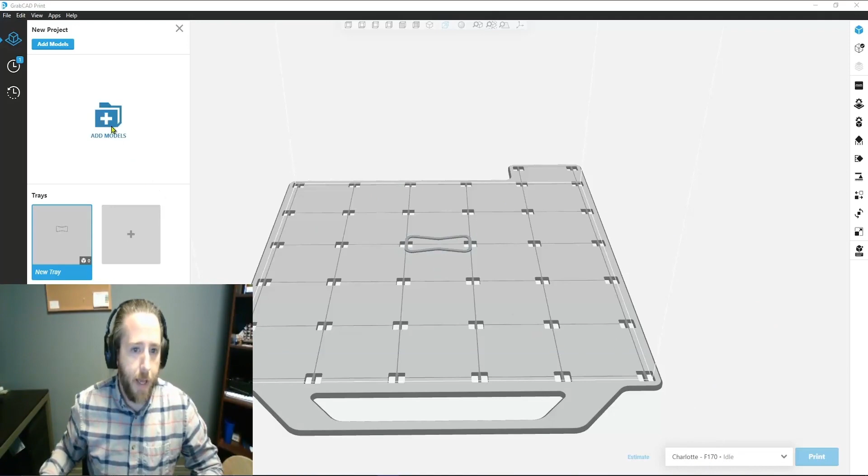Next, we're going to add our model. We're going to click on Add Model and open it up. We're using our native SolidWorks part file, and that is not the orientation we want to print this in, so we're going to go ahead and orient our face to plane.

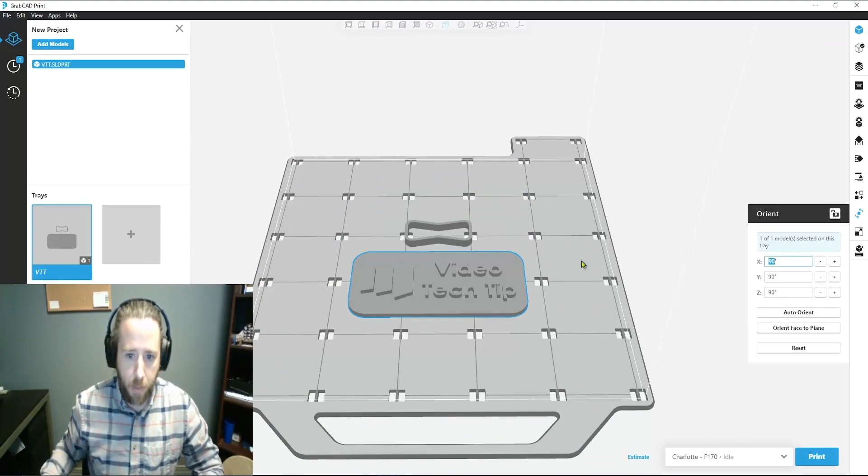This bottom part, we're going to put on the bottom. There we go. We have our model oriented the way we would like.

Check our tray settings. We're going to print it at 7 thousandths. We are using ABS. Everything's looking good there. We're going to change it to printing solid, and smart support, even though we won't have any supports here. So we're good to go.

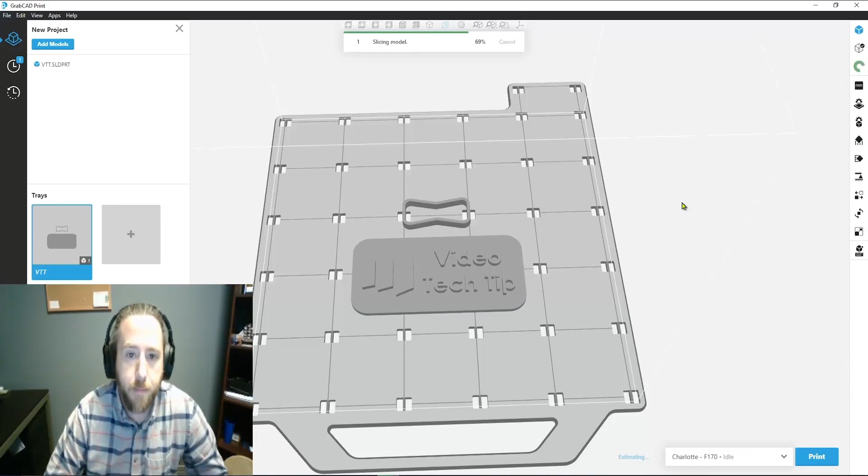We're going to go ahead and slice this file. And now we're looking at our realistic slice preview.

This is where we can add our Z pause, as you see here on the right side. An important thing to note about adding Z pauses in GrabCAD Print is the pause is at the beginning of the layer you're looking at. That'll make more sense here in just a second.

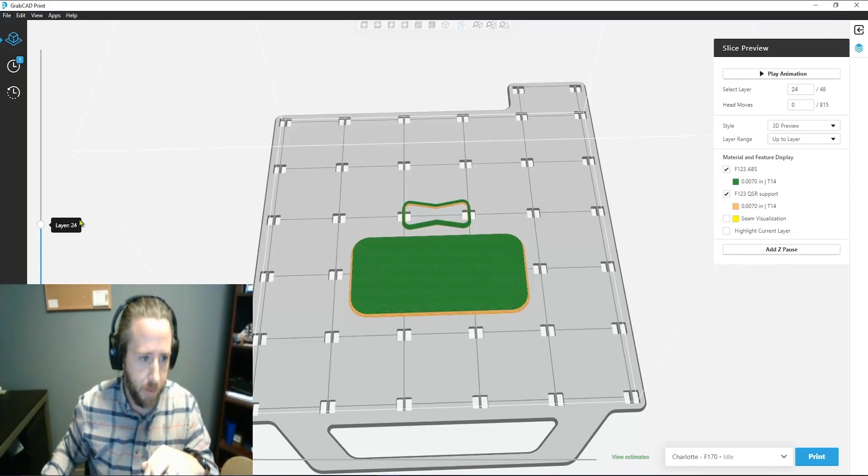So we're going to go up through this, and we want to do our pause and color change on the first layer of the text that's embossed on this plaque. It looks like layer 31 - you can see the text highlighted as we go up there. So layer 31 is where we're going to add this Z pause.

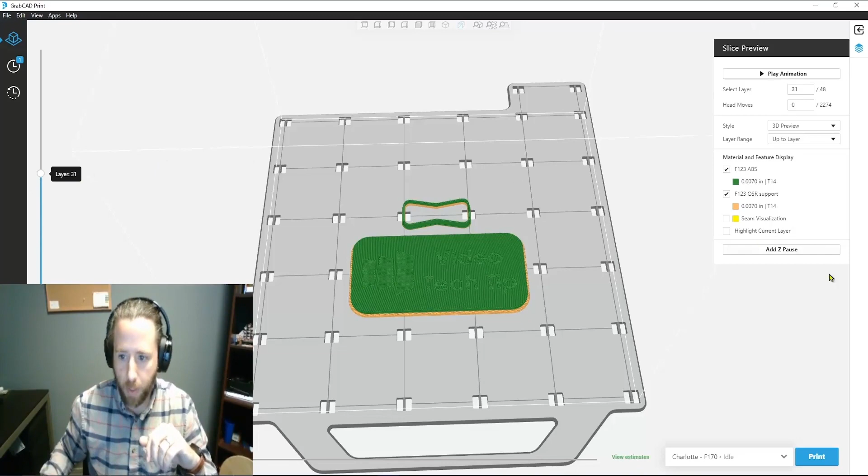We'll go ahead and add our pause, and you'll notice we get a color change here. Our Z pause is highlighted in this blue color, and we also have a diamond here on our slider bar on the left side. It's a really good visual indicator of where that pause is.

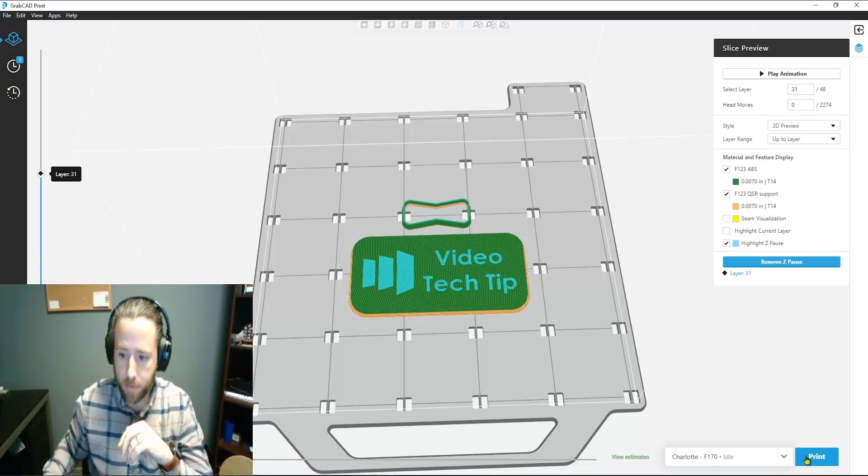And in the software, that's all we need to do. So we're going to go ahead and send this to our printer, and I'll see you at the next step.

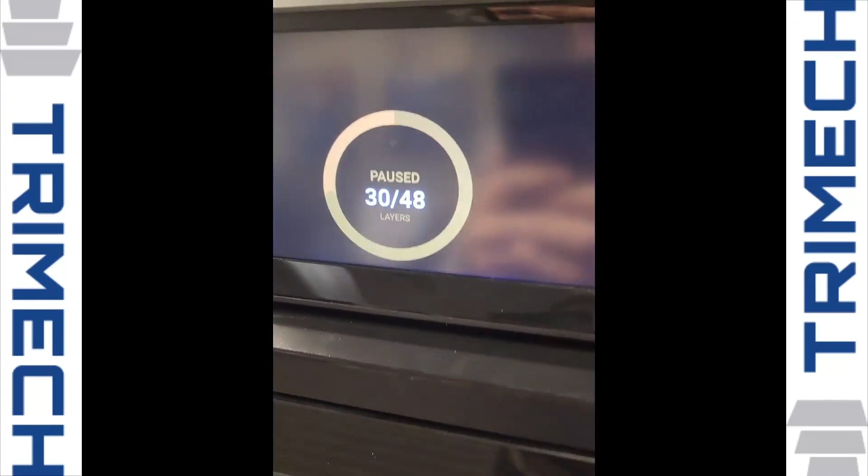So here we are at the printer. We can take a look and see that it is paused. Take a look at our print there - we're just about ready to start doing that embossed text, and we're going to switch to a different color.

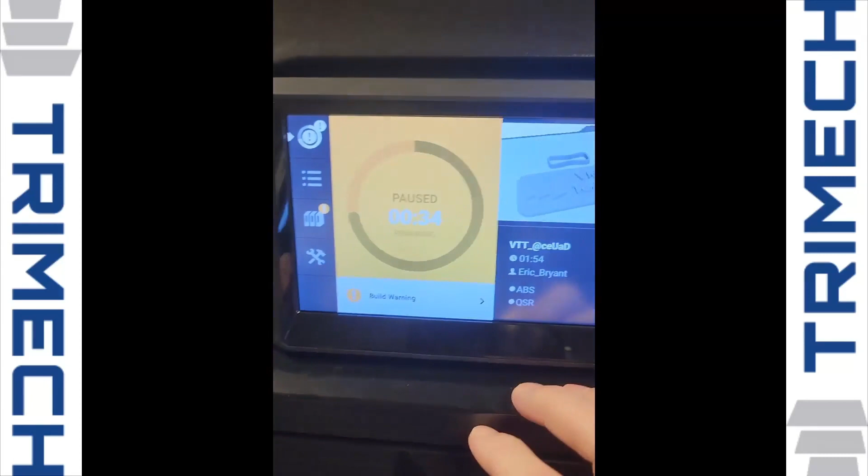So what we're going to do is go to our material button here. We're going to click on the selected material, and then we're going to unload it. Our material's done unloading, so we're going to spool it back up. Right, we got it spooled back up.

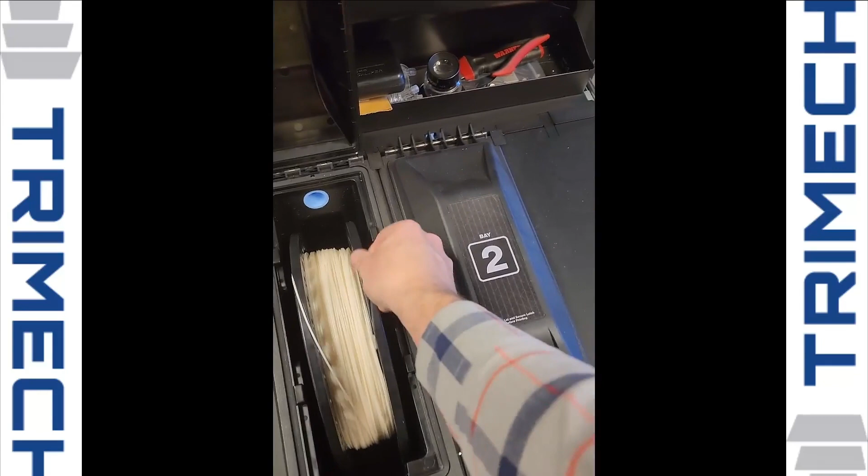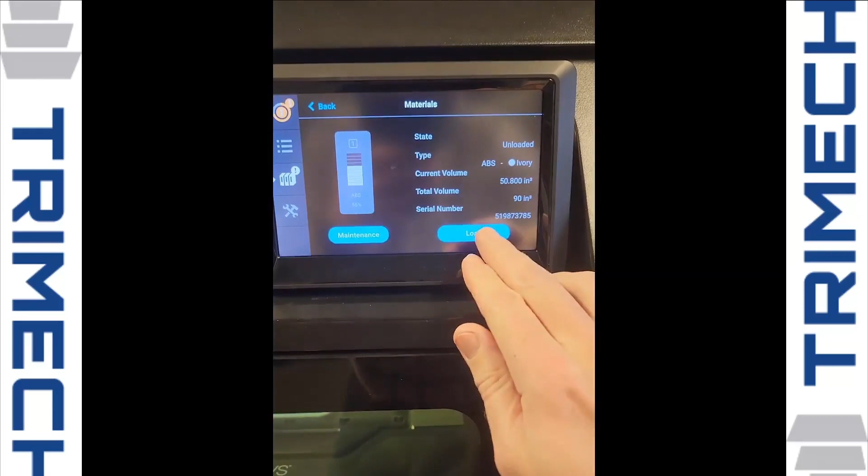We're going to remove it from the material bay. We have our ivory sitting right here ready to go. I'm going to drop it in, feed it back in. Now we can load this material. Close this.

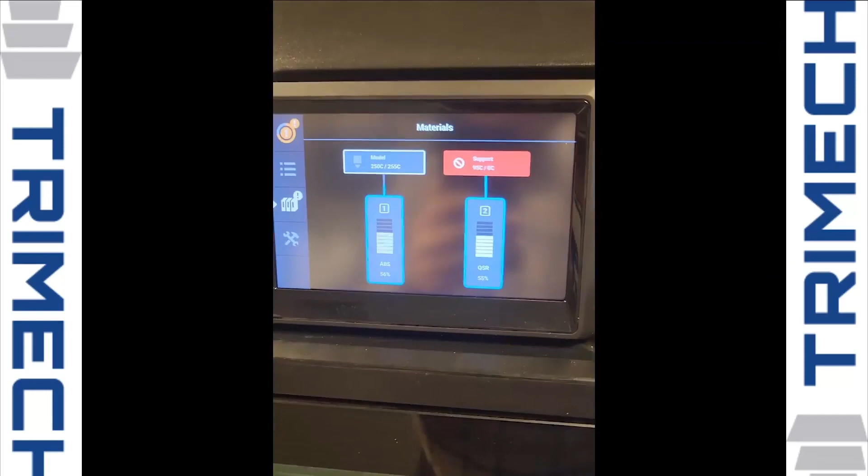We're done with the material reloading. The machine will automatically do a purge and wipe on the wipers. We're good to go.

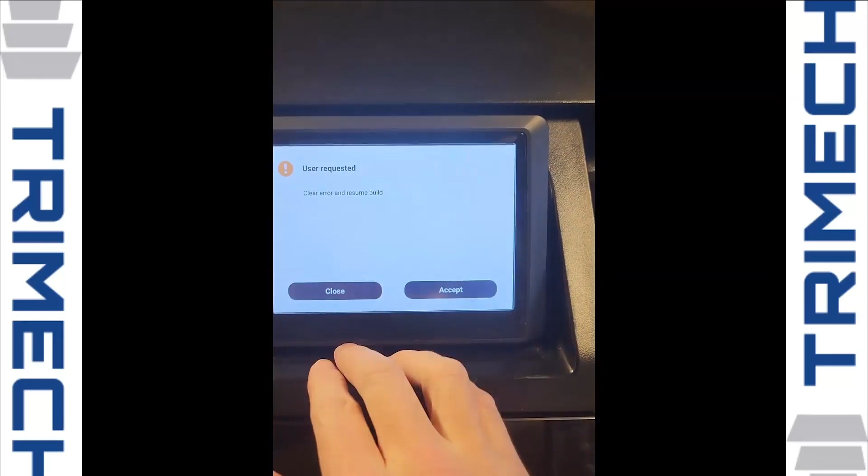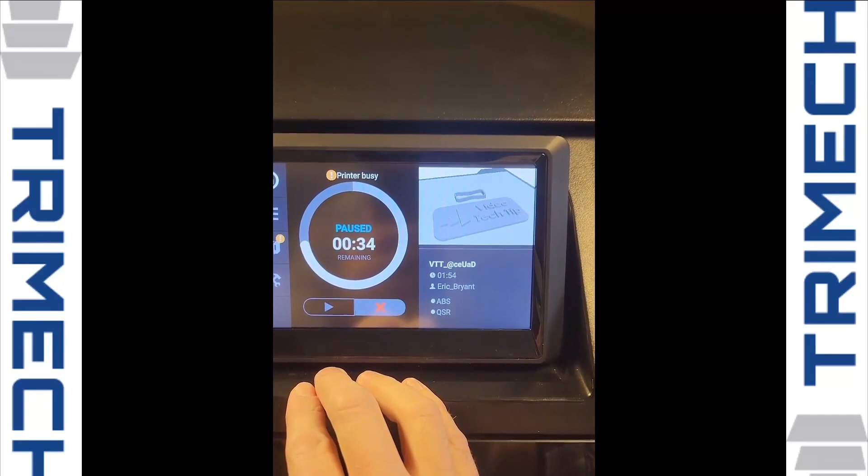And we can go ahead and resume our print. We'll check back in once our print is finished and take a look at the final product.

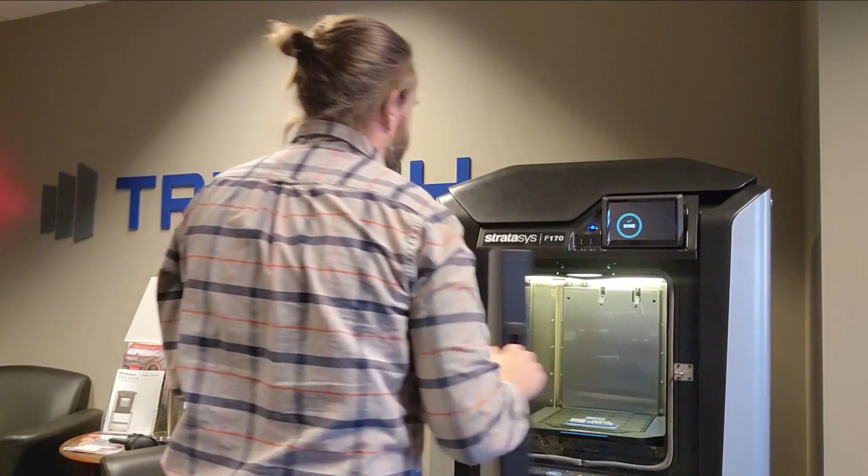Our print's finished. Let's pull it off the build plate and take a closer look. This is our finished product.

The blue base and the white letters have a nice contrast and makes the text very easy to read. This is just one application of a pause and color change.